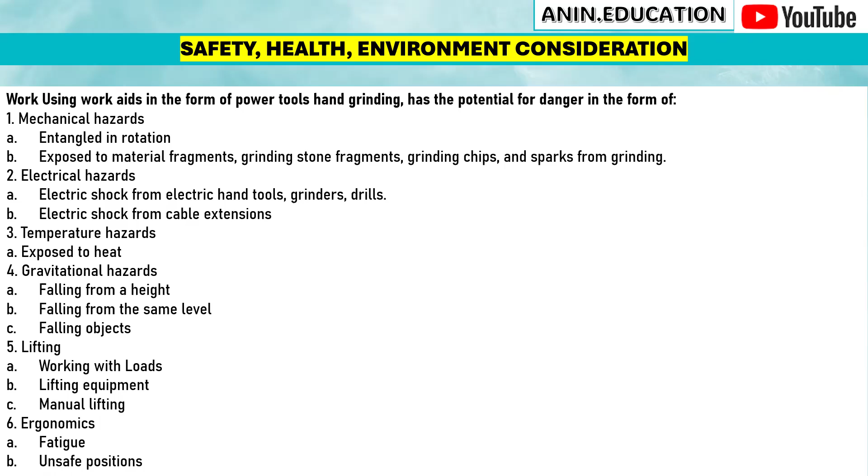A, working with loads, lifting equipment, manual lifting. And the last one is ergonomic: A, fatigue and unsafe positions.

Next, hand grinding tools. Grinder: the picture shows its functions. Hand grinding can be used to cut iron pipes, ceramics, tiles, and other materials using the appropriate cutting disc.

Number two, used to scrape smooth metal or concrete surfaces using a coarse grinding stone. Number three, sharpening equipment to sharpen work tools such as knives, hoes, and other sharp objects.

Number four, removing rust or old paint using a wire wheel or flap disc; hand grinding can clean rust, painting residue, and crust on the metal surface.

Number five, surface finishing to smooth the surface or corners of welding results so that there are no sharp edges. And number six, shaping material can be used to form certain parts of metal or other material as needed.

Tool name is abrasive wheel or brush. The function is surface grinding, used to wear down material, especially metal, such as when smoothing a weld or shaping surfaces.

Number two, cutting material. With the cutting wheel type, abrasive wheels can be used to cut metal, steel pipes, and other hard materials.

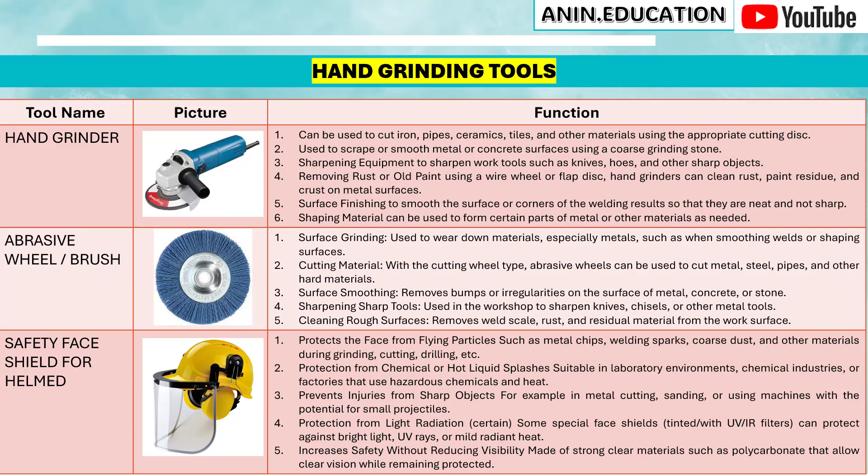Preparation work. The purpose of job preparation is so that the work can be done safely, effectively, and efficiently by using work aids in the form of power tools hand grinding.

Number two, tools and materials must be ready and in suitable condition for use according to standards. Number three, potential hazards from using the hand grinder can be controlled.

Work step: prepare other work equipment; the danger is hands trapped, and the control is using gloves. Work step number two, determine the type of grinding and the grinding stone, choosing the media to work on.

The dangers are the hand caught in the safety guard and the grinding stone cracking or breaking. The control is to avoid pinch points on the safety guard, and wear gloves when selecting the hand tools in the form of power tools based on the type of work: grinding, cutting, or surface cleaning.

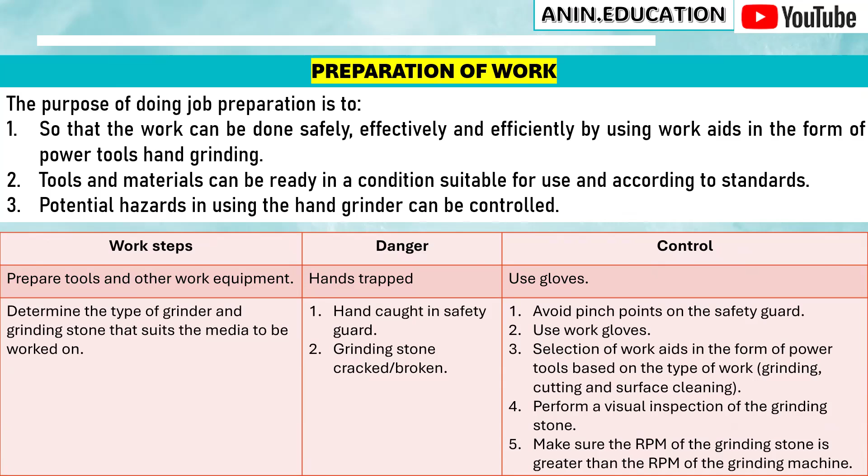Step number four is the visual inspection of the grinding stone. Make sure the RPM rating of the grinding stone is greater than the RPM of the grinding machine.

Preparation work step: check the conditions of the grinding machine. The danger is electrocution, and the control is to make sure the breaker is in the off position, and perform a check of the machine guard conditions.

The danger is the hand being caught in the safety guard, and the control is to avoid pinch points of the safety guard. Work step number three, perform a running test on the power tool without the grinding stone or brush attached.

The danger is electrical hazard, electric shock. The control is to install an ELCB and make sure the ELCB is in good condition.

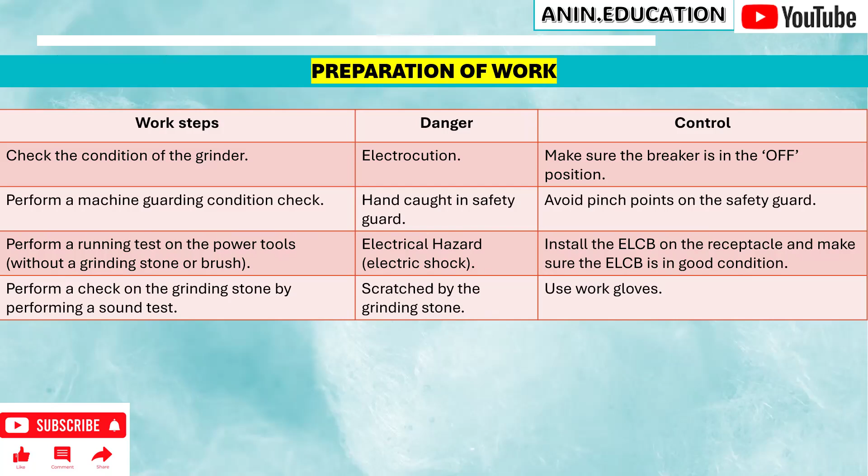Work step number four, perform a check on the grinding stone by performing a sound test. The danger is being scratched by the grinding stone, and the control is to use gloves.

Installing grinding machine equipment, the purpose of the operating hand grinding is to ensure that the workpiece process is in accordance with the safe work procedure and produces quality work.

Work step: remove the plug or hose from the power source and install the grinding guard, tighten the screw and make sure the grinding guard doesn't move anymore.

The dangers are compressed air and electric hazard or electric shocks, hands trapped, falling object being lifted and handling, hands impaled, stumbling over materials while walking, scratches by the solid object.

The control is don't point the air hose at the body, always use glasses properly and correctly, ensure the work area is free from scattered objects, use standard safety shoes, install the ELCB on the receptacle and make sure the ELCB is in good condition.

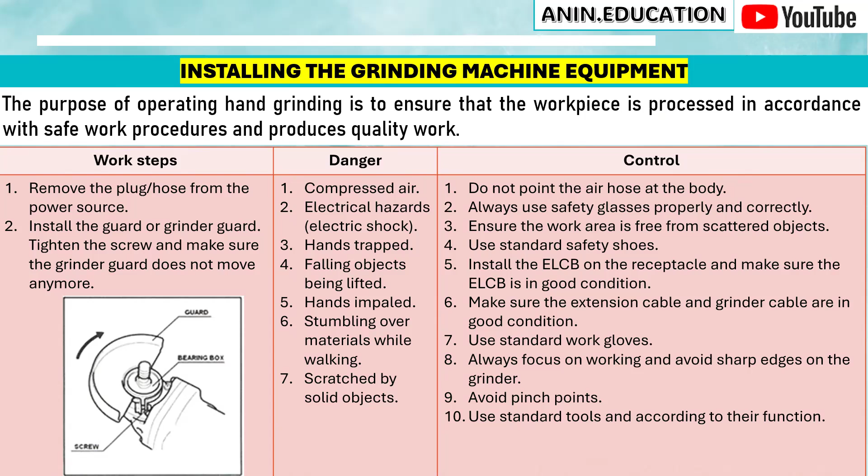Control number six: make sure the extension cable and the grinding cable are in good condition. Use standard work gloves and always focus on the work, avoid sharp edges on the grinding, avoid pinch points, and use standard tools according to their functions.

Work step number three: install the grinding handle as necessary and install the grinding wheel accessories - grinding stone and the following: inner flange, plastic pad, wheel, and lock nut.

Press the shaft lock and tighten the lock nut with a special key. Make sure the shaft lock doesn't engage when the grinding is running.

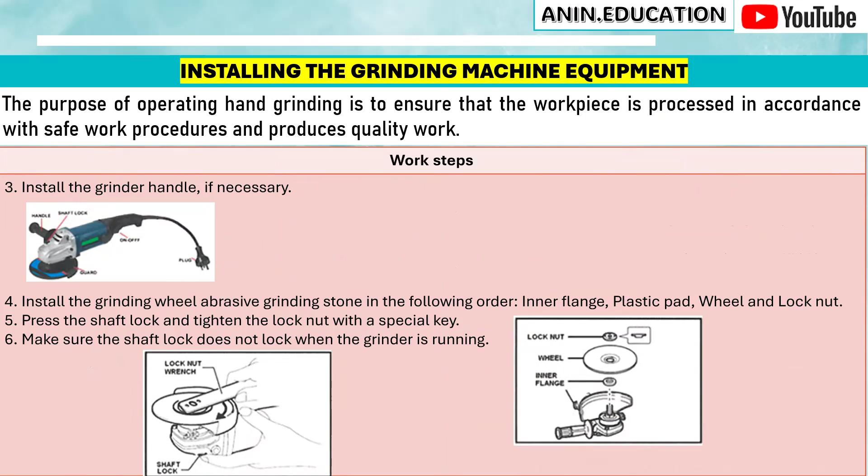Using a hand grinder, work step number one: install the barricade or guard, set the switch to the off position, rotate the grinding wheel manually and ensure that it doesn't run aground and rotates freely, connect to the power source and position the grinding wheel at a grinding angle of no more than 15 degrees.

Avoid grinding in the direction B (see picture) for new grinding wheels when grinding for the first time.

There are five dangers: hand trapped, slip, fall, fall of lifted object, hand stabbed, and foreign bodies in the eye. Control: use standard gloves, use standard tools appropriate for their functions.

Avoid pinch points, use standard safety shoes and use a face shield combined with head protection. Install the ELCB on the receptacle and make sure the ELCB is in good condition.

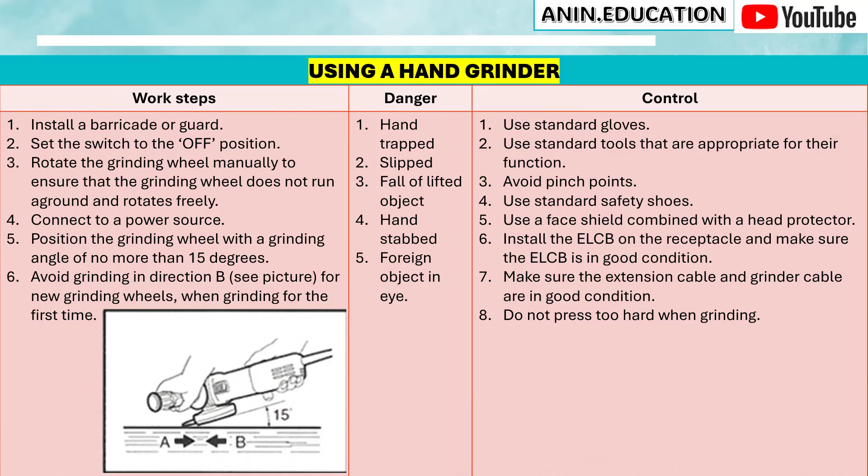Number seven, make sure the extension cable and the grinding cable are in good condition. And the last one is do not press too hard when grinding.

Work step for hand using grinding, number two: turn off the grinder by setting the switch to the off position, and put down or store the grinder after the grinding stone has completely stopped running.

Danger number six is electric hazard, electric shock, and grinding stone breaking safety guard. Control: avoid jerks during the grinding process, make sure the grinding stone RPM is greater than the grinding machine RPM, make sure the grinding stone safety guard and its fastening bolt are installed tightly and correctly, and the machine is in the off condition.

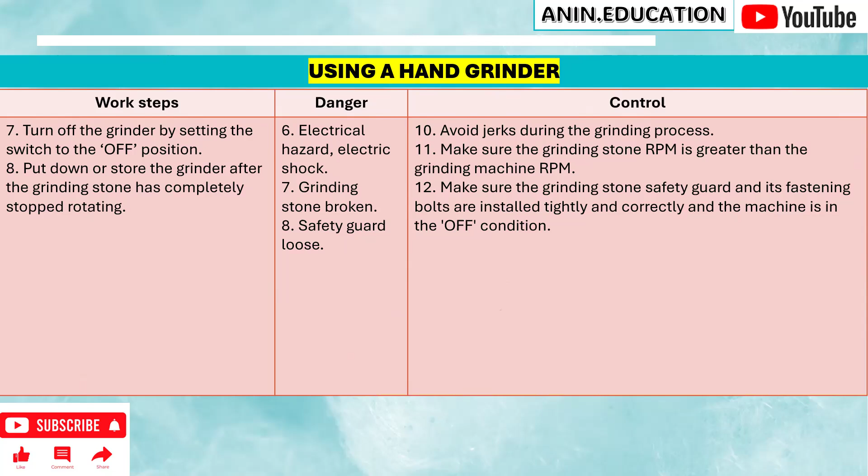Replacing the grinding stone or brush. Work step number one: position the switch off and disconnect the plug or hose from the power source. Remove the worn grinding wheel in the following order.

Loosen the lock nut, remove the grinding wheel and replace it. Press the shaft lock nut with a special key. Make sure the shaft lock doesn't engage when the grinder is running.

The dangers are: number one, electrical hazard or electrical shocks, hazard of residual power in the grinder, foreign objects in the eye, hands trapped, hands impaled.

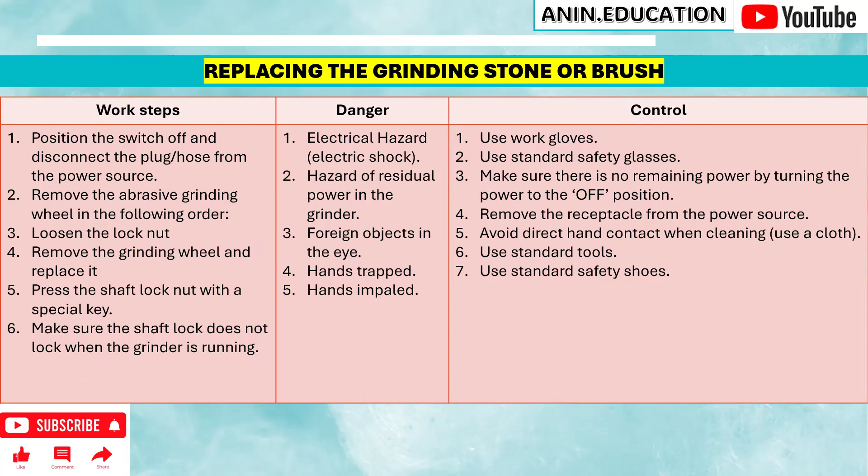The control is use work gloves, use standard safety glasses, make sure there is no remaining power by turning the power to the off position, remove the receptacle from the power source, avoid direct hand contact when cleaning, use cloths, use standard tools and use standard safety shoes. Finishing the work using power tools hand grinders, objective is to ensure that supporting tools remain in good condition.

Work step number one: remove all attachments attached to the grinder, clean the grinder and work area, collect tools and other equipment and clean them, collect waste and trash according to type.

The dangers are hands scratched by the sharp edge of tools, hands caught, scratched and punctured, environmental pollution B3 waste, slipping.

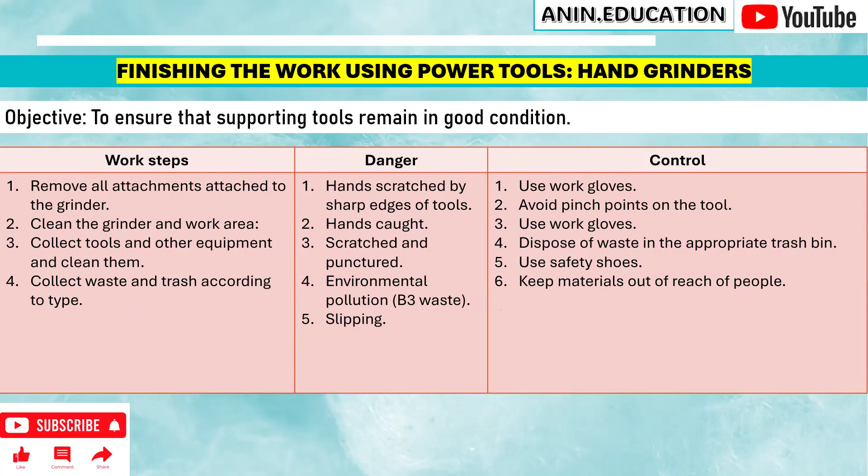Control: use work gloves, avoid pinch points on the tool, dispose of waste in the appropriate trash bin, use safety shoes, keep materials out of the reach of people.